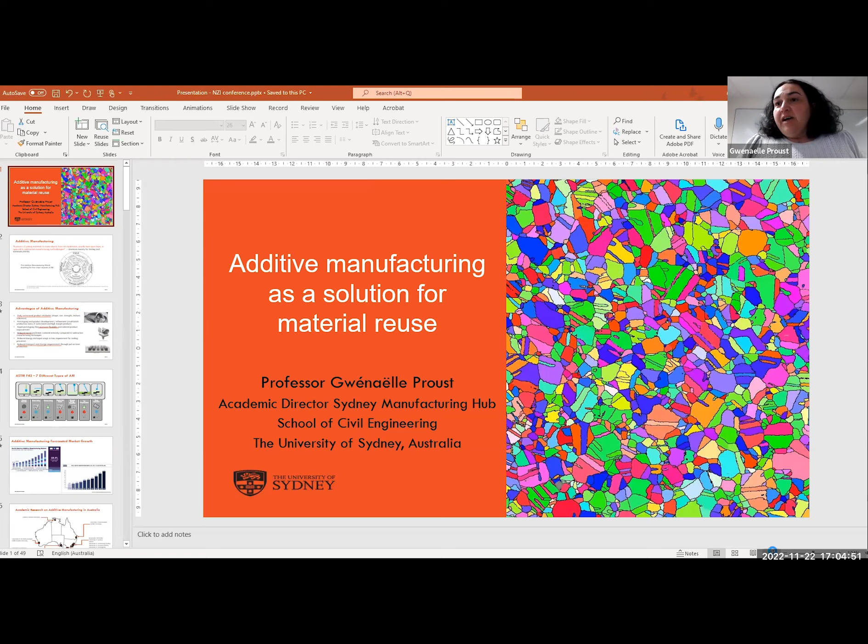Thanks, Anna. So I'm going to share my screen, and I also have to say that my final exam is taking place from now till 6:30, so I'm basically on call. If my mobile rings, I'm going to have to take the call - that means there's a problem with my final exam, so please apologize if I have to leave. Hopefully enough people are reviewing the exam that there should be no issue. You should see my presentation now - do you see the normal mode or the presenter mode?

Thank you, everybody. I'm going to talk about additive manufacturing as a solution for material reuse. Before that, I'm going to talk about what additive manufacturing is. I took the definition from ASTM, the American Society for Testing and Materials, which defines additive manufacturing as a process of joining materials to make objects from 3D model data, usually layer upon layer, as opposed to a subtractive manufacturing methodology, which is what has been done in the past.

This encompasses a lot of things in additive manufacturing. I've also added here the additive manufacturing wheel that shows the different things that need to be considered when people want to do additive manufacturing. There's the method or technology that needs to be used, the material that you want to use, what your final application is, and what type of input you're going to need to provide.

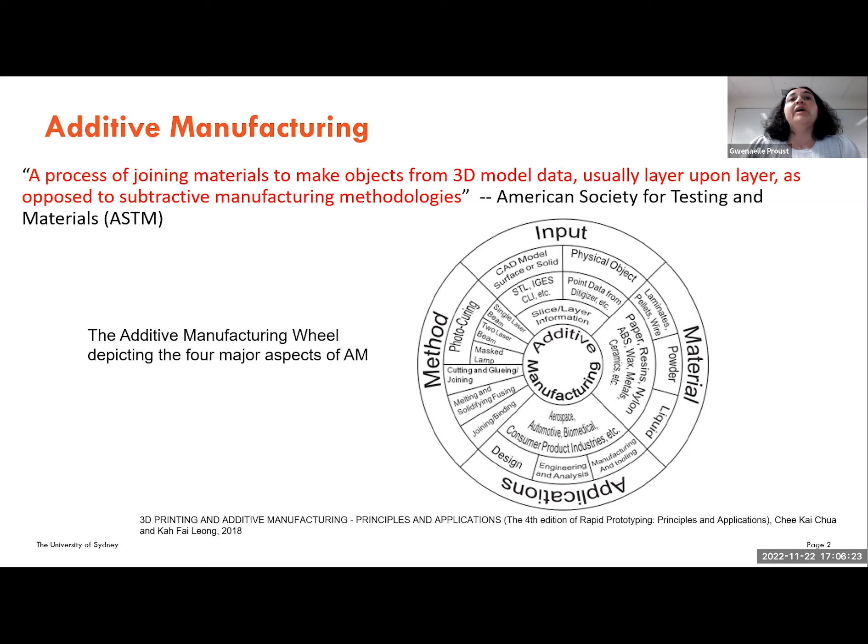So it's not like in additive manufacturing there is one machine that's going to fit all purposes. There are different technologies, as I'm going to explain, and there's a lot of consideration that needs to be taken into account while people are trying to find the proper additive manufacturing technology for their applications.

So what are the advantages of additive manufacturing? You can truly customize product attributes. You could make a single component and the investment would be the same as if you made 100 components - you don't need to make a mold. You can change the shape just by changing your 3D model.

There is no limited number of components that you need to make to have a return on your investment, because changing the shape, you will not need to change anything on the machine. It's a fast way to do prototyping and product development and refinement, small batch production.

You can customize a lot of things. During the process, you can change your mind. You can have the design engineer coming with new requirements, and you can remake it. That does increase the flexibility and help you tailor product improvement for the applications.

It's also a process that reduces waste during manufacturing, because you are not doing a subtractive technique, so you don't waste material by machining it and removing it from a block. Here, you're technically using only the material you need to make a component.

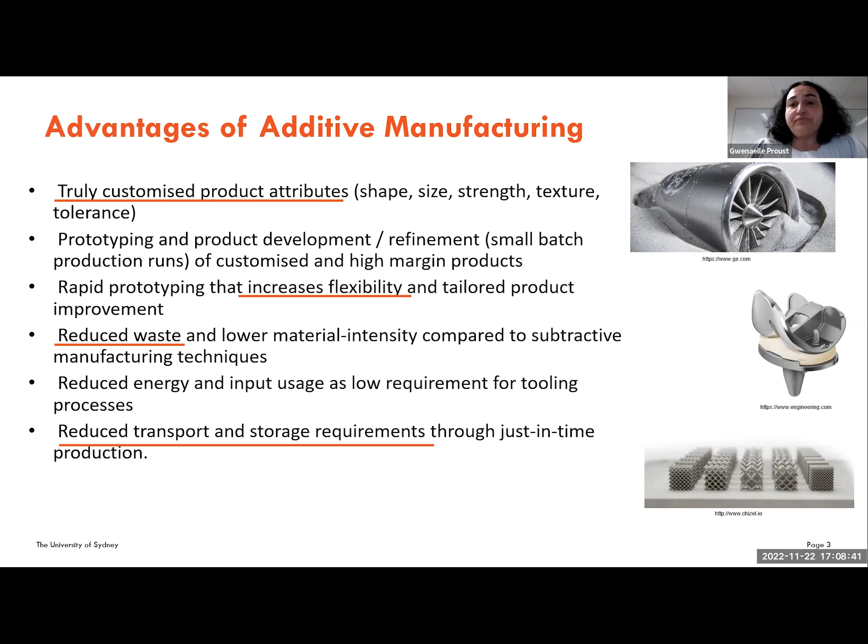So if we talk about additive manufacturing, I already mentioned there are different technologies that exist. According to, once again, the American standards, they have categorized 7 different technologies for additive manufacturing.

The one that people are most familiar with is material extrusion, which is usually the one that everybody has seen. Some people even have that at home, where you have a polymer filament that you're going to melt, and then you deposit the melted material layer by layer and create a new 3-dimensional object.

There are different techniques that exist now in material extrusion. You can even do metal material using this technology. You can even do ceramic using paste printing. So that's a large category - one category of additive manufacturing, but behind that, you have different technologies that exist to produce different types of material.

Then you have binder jetting and material jetting that are similar, where you have powder material that is going to be encapsulated in some binding material. In binder jetting, you build your part inside a resin, for example, while in material jetting, you only deposit the material that you need. But the principle is the same - you're going to have to cure this material and form the part.

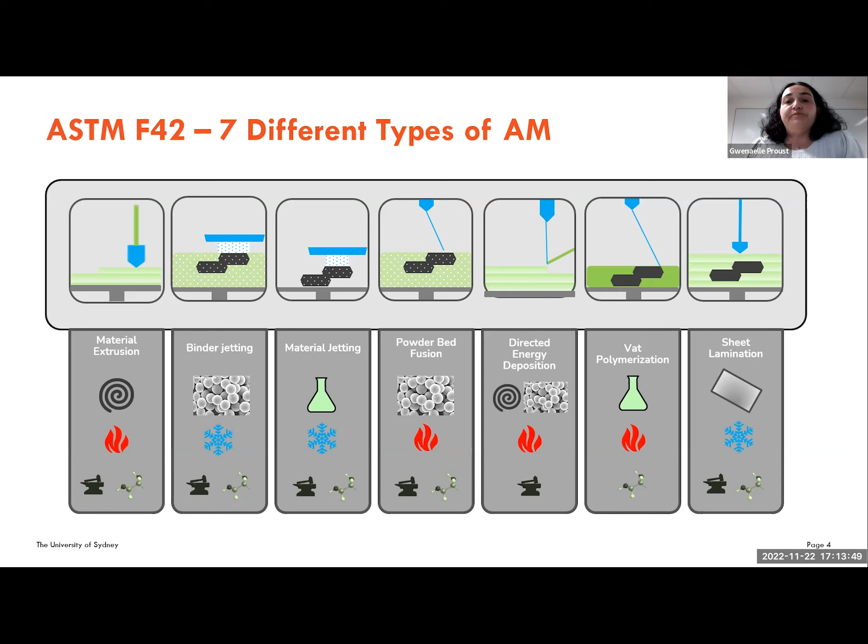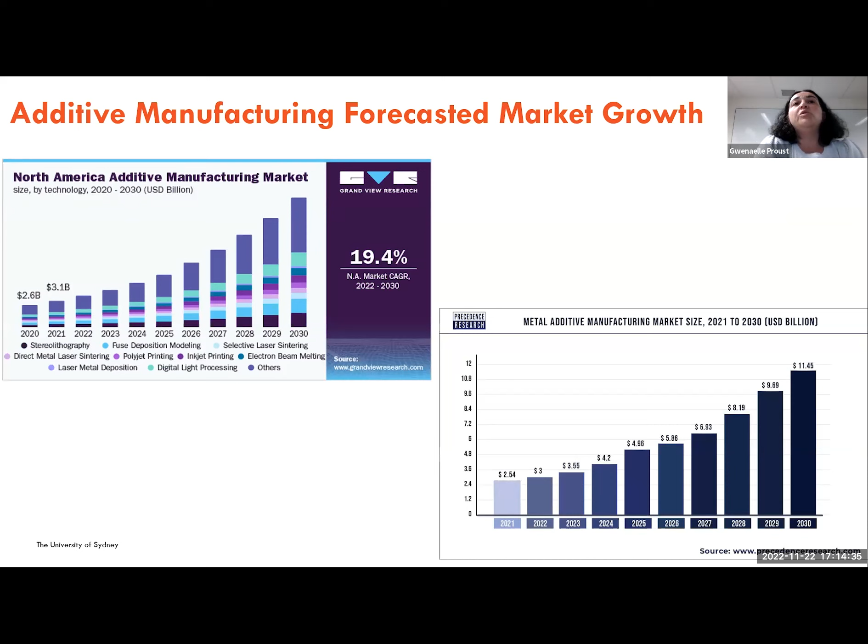Now, if we look at the forecast market for additive manufacturing, here are the numbers for the US. On the left, the first graph shows the predicted use of additive manufacturing according to the different technologies that exist, and you can see the prediction shows there's going to be growth. This encompasses all metal, ceramics, polymer, and composite material. On the right, this graph is only limiting itself to additive manufacturing for metals, and you see that metal is also going to grow, but that's why the numbers don't match between the two graphs—one is metal, the other is all materials combined.

Now, if we look at Australia, what's happening? Additive manufacturing is a hot subject at the moment. Here it's just a map that shows you that different universities and labs around Australia have invested in capabilities to look at additive manufacturing. There are different types of technology all around those places—a lot of powder bed technique, but also some more exotic things that exist at one university and another at another university.

That being said, for people from other universities, it might be time to have a national talk to see how we can advance additive manufacturing in Australia by combining our efforts together, and try not to compete with the same technology, but see what we can do to help each other and stay on top of what's happening, because additive manufacturing technology is evolving really fast. Keeping track of what's happening is going to require a lot of investment in the future, and I think we need to talk about how to combine our money and knowledge and expertise to keep on top of things. But that's a discussion for another time.

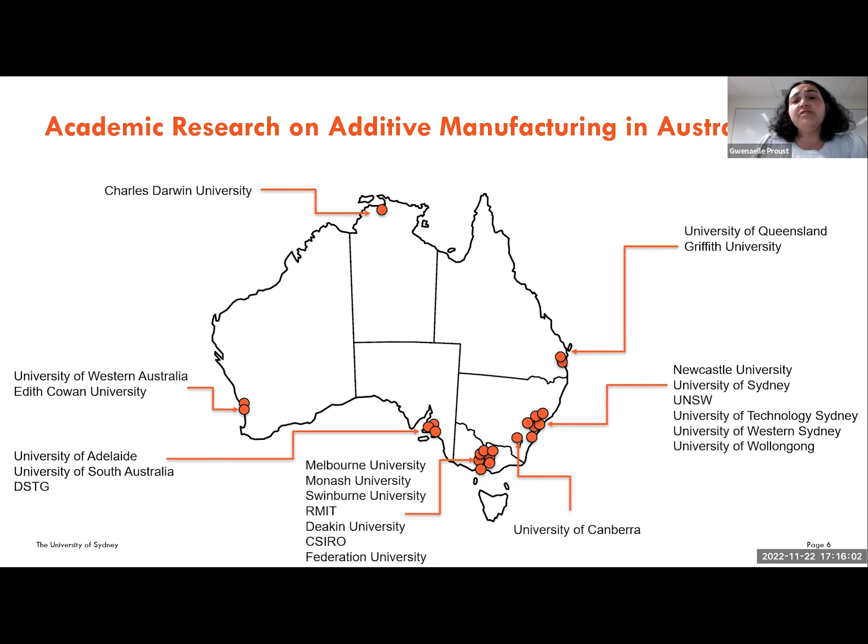Now we're talking about circular manufacturing economy. If we look at the traditional way manufacturing was done, we were talking about a linear economy where there was raw material, production, use, and then a lot of waste. That's not to say they were non-recyclable—for some of those, I think they were just not recycled. I think there has been a reuse economy put in place in the past already, where some recycling has been happening to add to production, but this was still not a circular economy.

If we look at what some governments, and I know in Europe, they've put this objective to have a real circular economy for manufacturing, where production, use, and recycling are all together and raw material is added as needed, but there is no more waste. So are we going to be able to reach that? And how can we do it? And how is additive manufacturing going to help us?

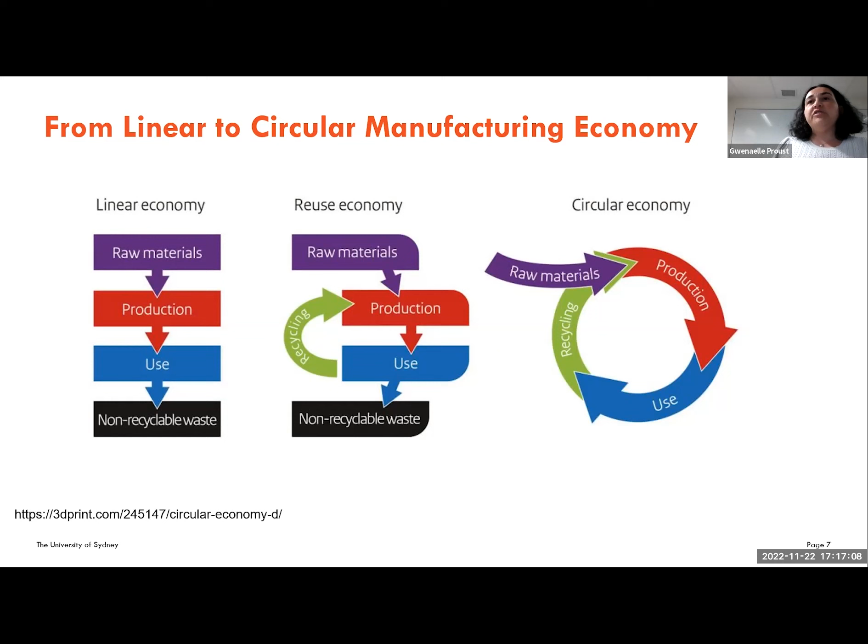I just want to show you some examples of what is already done in additive manufacturing in the circular economy concept. So these are some products. The first one on the left—if people look at the Olympics in 2021 in Tokyo, if you notice where the people were standing on the podium, these were actually 3D printed podiums, made from upcycled pellets. I think they produced about 21 of those podiums, all made from recycled pellets. There are a lot of companies—I just show one example here—that make glasses frames using recycled plastic, and they are making those frames using 3D printing technology.

This is about polymer. Can we do something with other materials? There is research being done at the moment, not yet on the market, to see if we can produce powder for additive manufacturing by recycling chips from machining. All the waste produced during machining - can we make something useful out of that? For the moment it was all scrap material with nothing to be done with it, and people are looking to make something useful out of it, such as powder. There are different projects going on in that area.

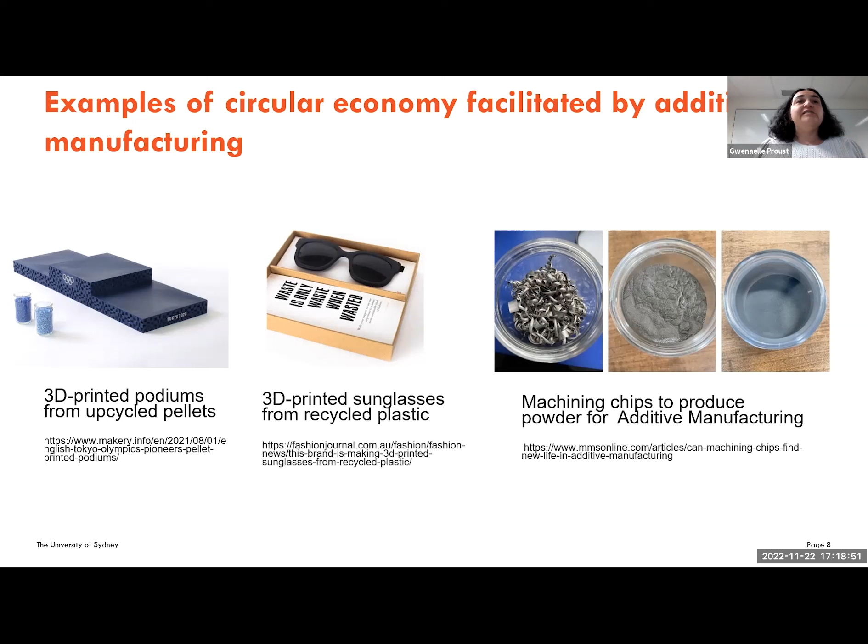What I'm going to present now is research that my group is doing at the University of Sydney on some specific projects. The first one is a collaborative work with Sandra Löschke, an associate professor in the School of Architecture at the University of Sydney. We also work with some people from the School of Chemical and Biomolecular Engineering at Sydney. John Mai, Jordan Gerdis, Yirong Wang and Todd Zhu were some students who have worked on this project, and a few more have started to work on it.

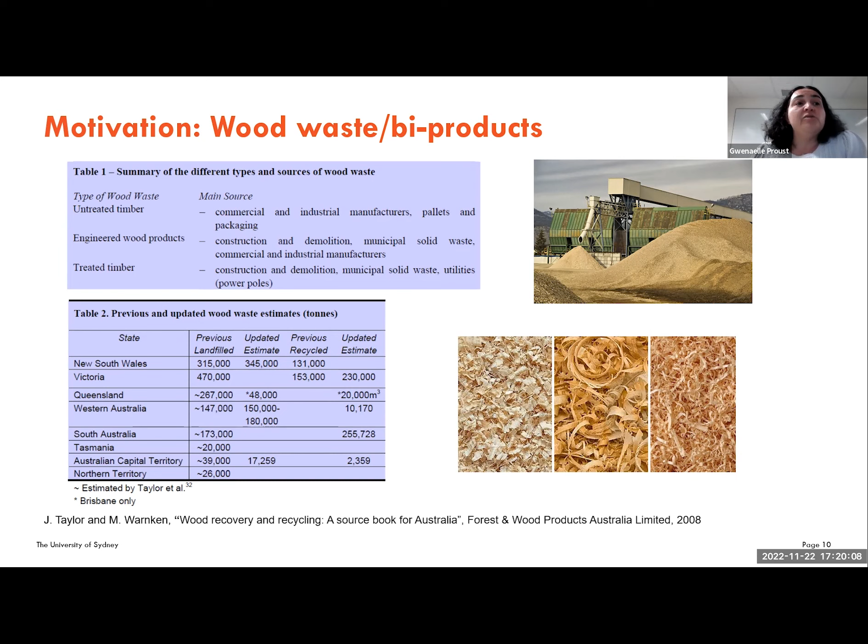What we want to do is upcycle forestry byproduct - can we do something useful with this product? So what is the motivation behind that project? There is a lot of waste in the wood industry coming from timber mills, or going to landfill from engineering products, solid waste, municipal solid waste, or even furniture waste. Is there something to be done with that? Can we reuse that material?

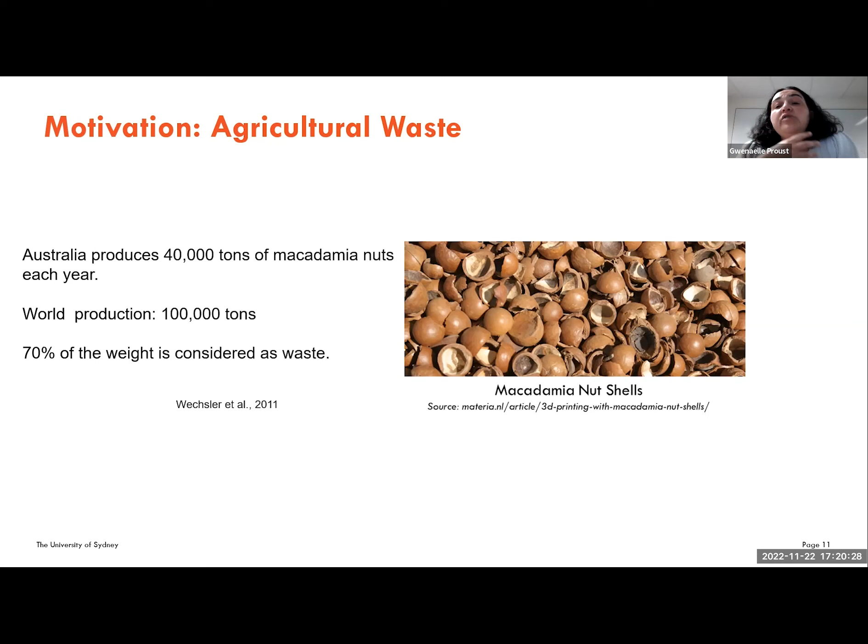There is also some agricultural waste. For example, macadamia nuts are produced in Australia - 40,000 tons each year - and 70% of the weight is considered waste because this is the shell that nobody eats. So what can we do with this waste material?

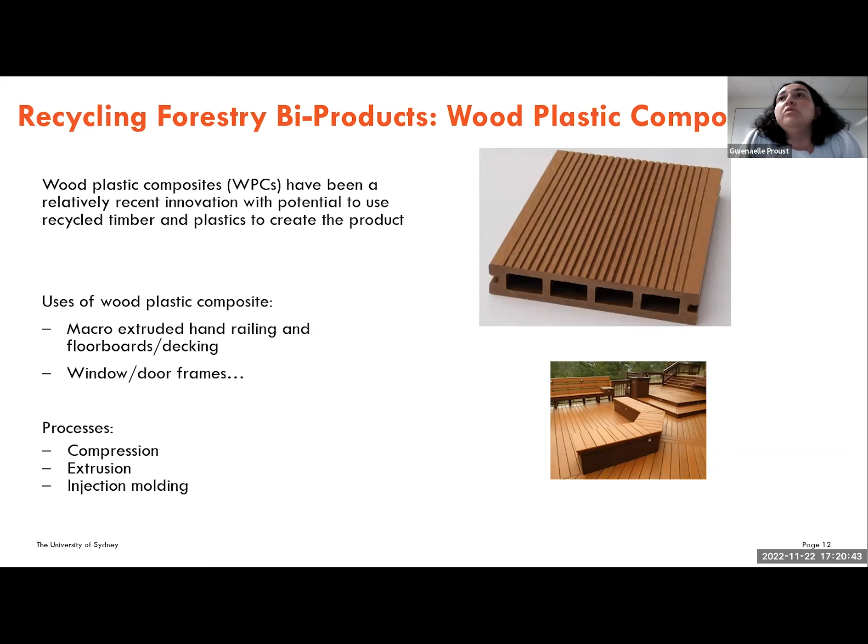Wood plastic composite is not necessarily a new concept, it's been around for some years now, and there is technology that has been used, such as compression, extrusion, injection molding, to produce those materials. We want to see if we want to make something more complex in shape, can we use additive manufacturing as a technique to produce those components.

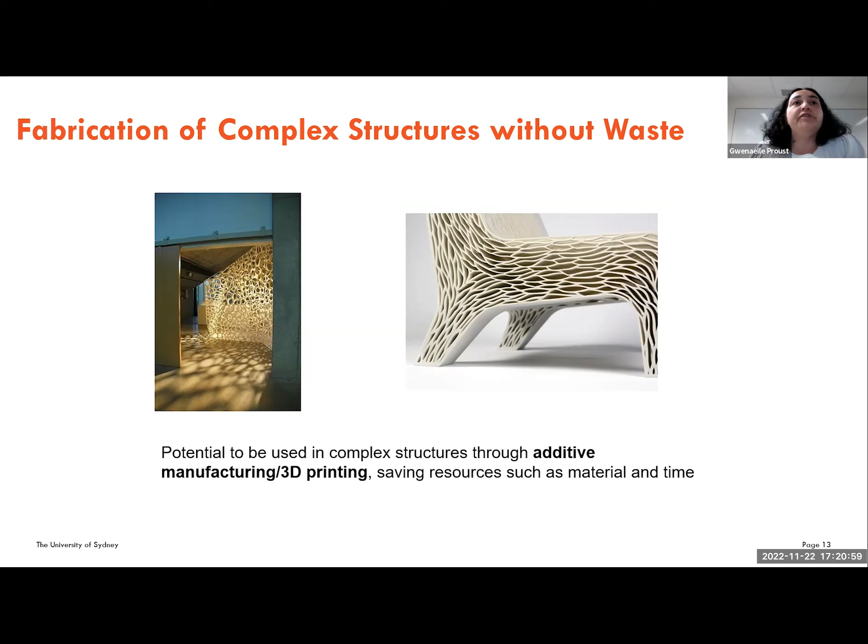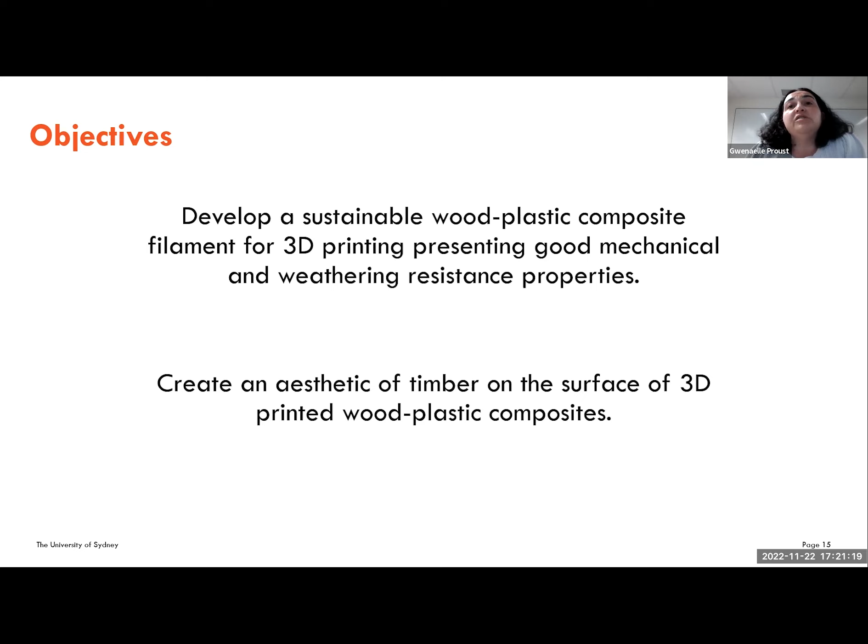For this project, we use one type of technology, which is fused filament fabrication technology. The two main objectives of this project were, first, to develop a wood plastic composite filament using material waste, and also to create an aesthetic of timber, because we want the thing to be aesthetically pleasing as well.

First we looked at developing the materials, so we looked at different sources of waste - some hardwoods from Australia, red gum, gray box, and also macadamia nutshell. Although in this presentation, I'm only presenting results on the red gum and the gray box.

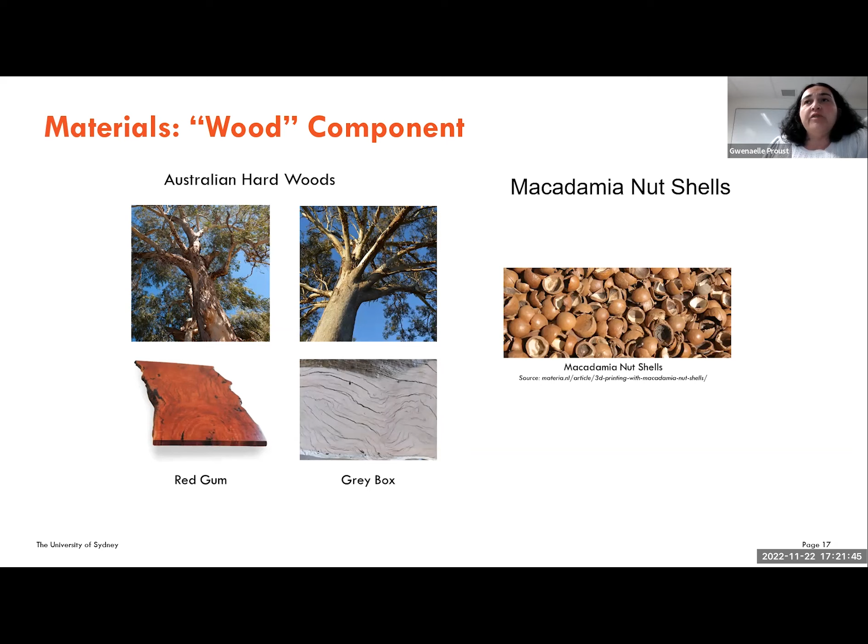Our material of choice at this moment has been ABS, because this is the most common polymer used in FFF, and this material can be recycled - that's the idea behind this choice. We have looked at other polymers as well, polycarbonate, PET, but I'm going to focus on ABS.

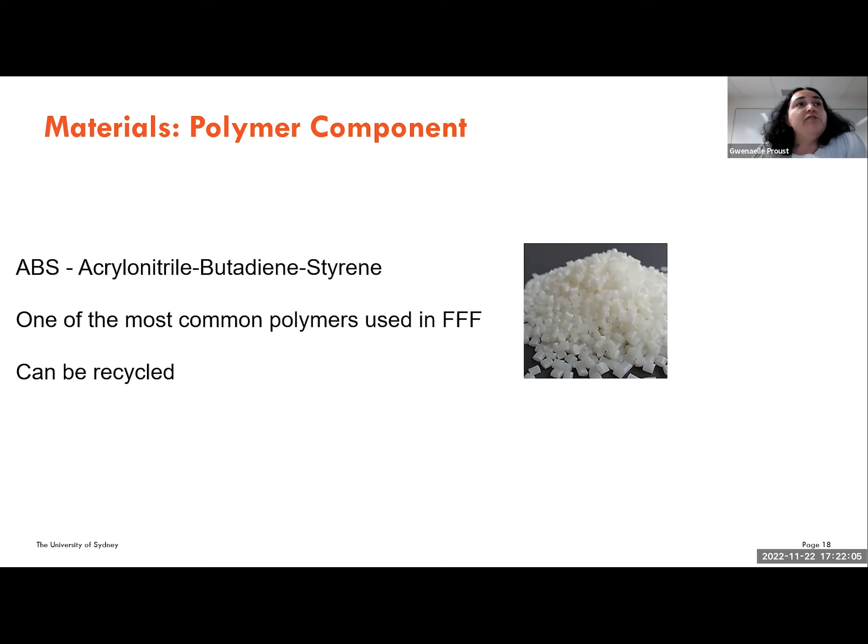Because wood and plastic actually don't like each other, we had to add some binding agent. Here we look at two different types of binding agents, maleic anhydride and lignin. Lignin is also a byproduct from the pulp or paper industry, and can be extracted and coming from waste as well. Although in this presentation, I'm going to only show data from our maleic anhydride binding agent.

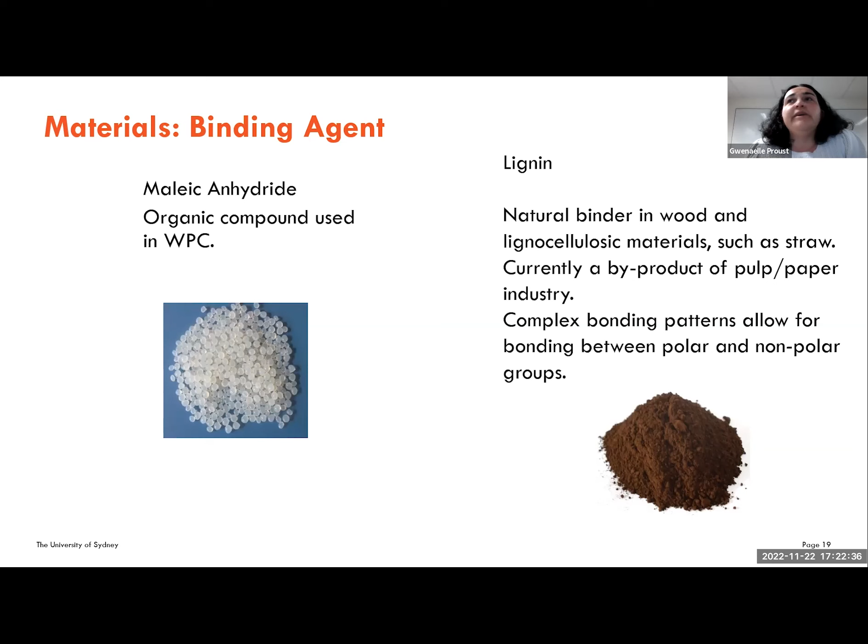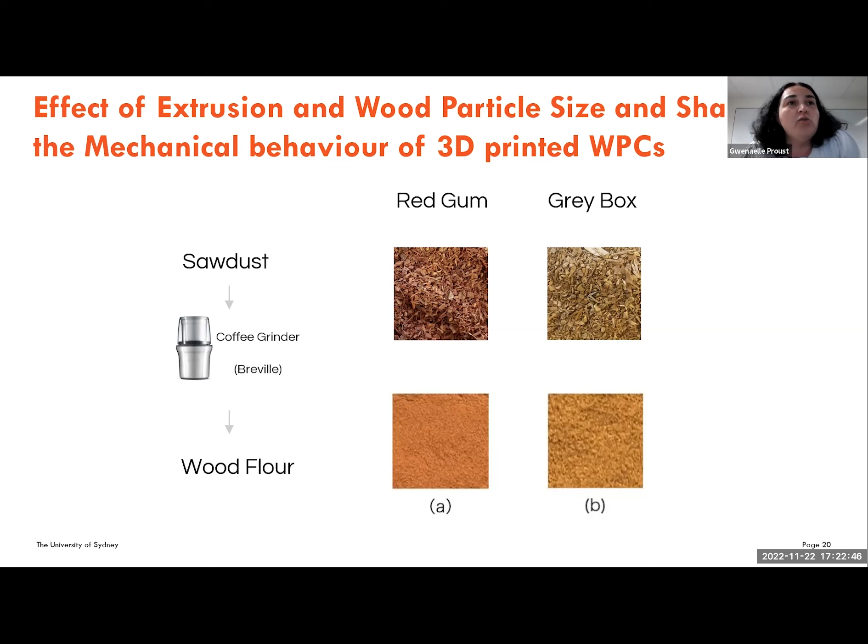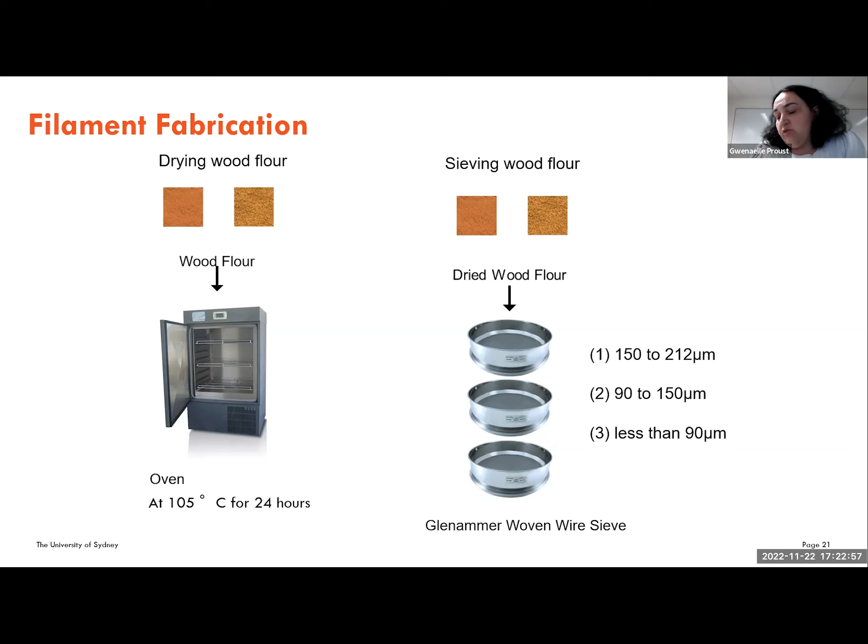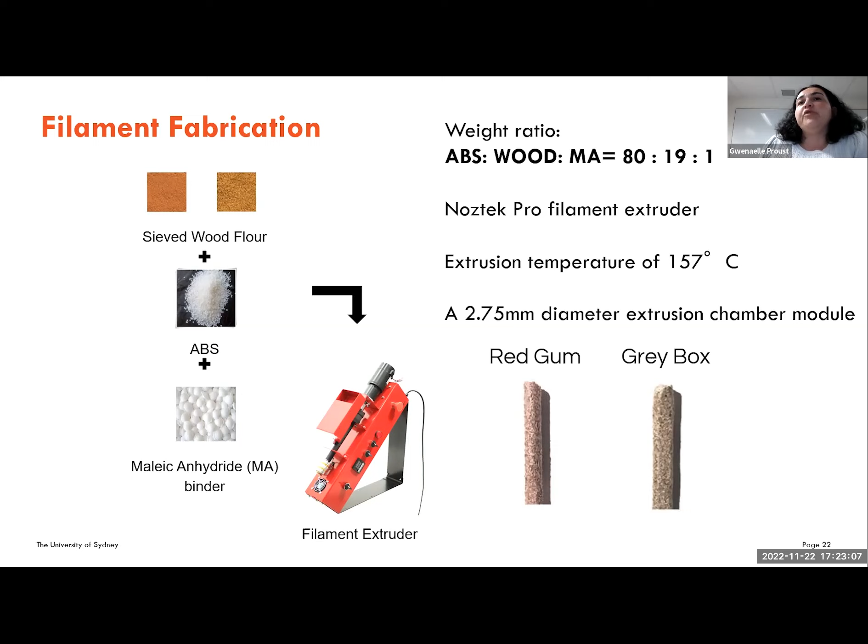We started by producing our wood flour using wood chips of red gum and Grey Box, in a low-cost lab where we had a coffee grinder to make our powder, but that works. Then we dry our flour, sieve it to look at the effect of particle size, and then added ABS and maleic anhydride. We put that on a filament extruder and produced some filament from the red gum and Grey Box. Then using this filament, we used a 3D printer to produce specimens for mechanical testing.

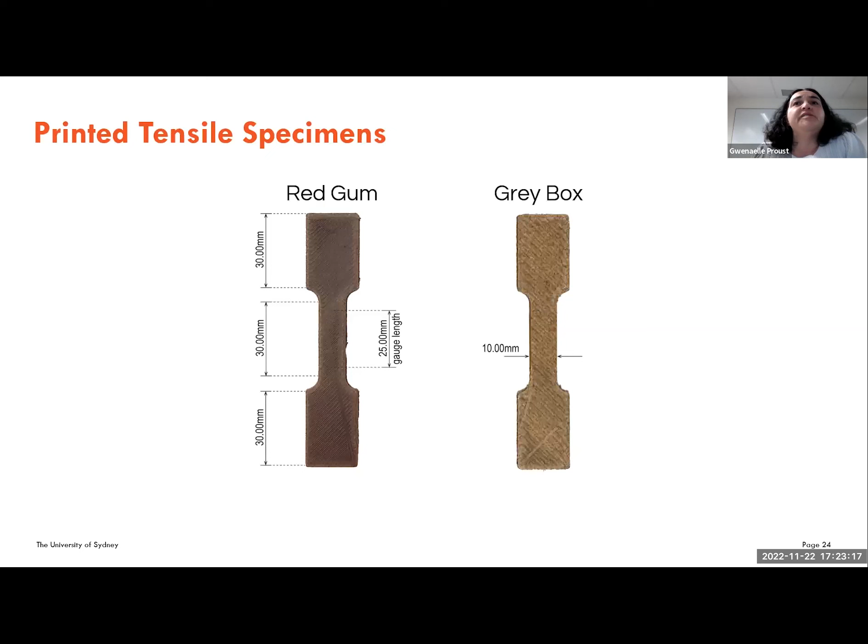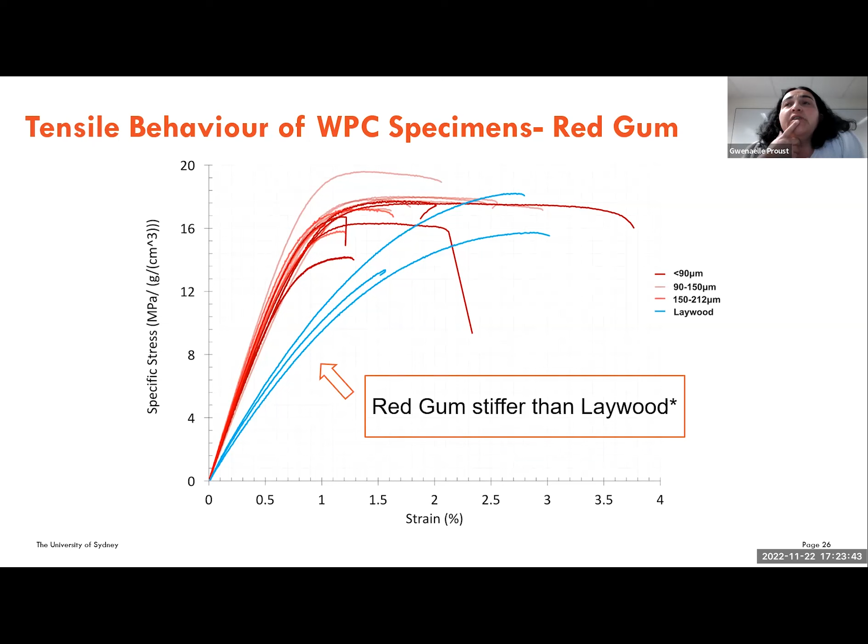These are all the specimens that a specific group has produced, and we've tested that. We compared the data with Laywood, which is a commercially available filament. What we saw is that in terms of strength, we were matching what was available commercially. The advantage is that our material was stiffer than what is available commercially. Same thing when using the Grey Box - it's not as strong, but still stiffer than the Laywood.

In terms of stress, we saw that there is an effect of particle size, especially for the Grey Box. For the red gum, it was less obvious.

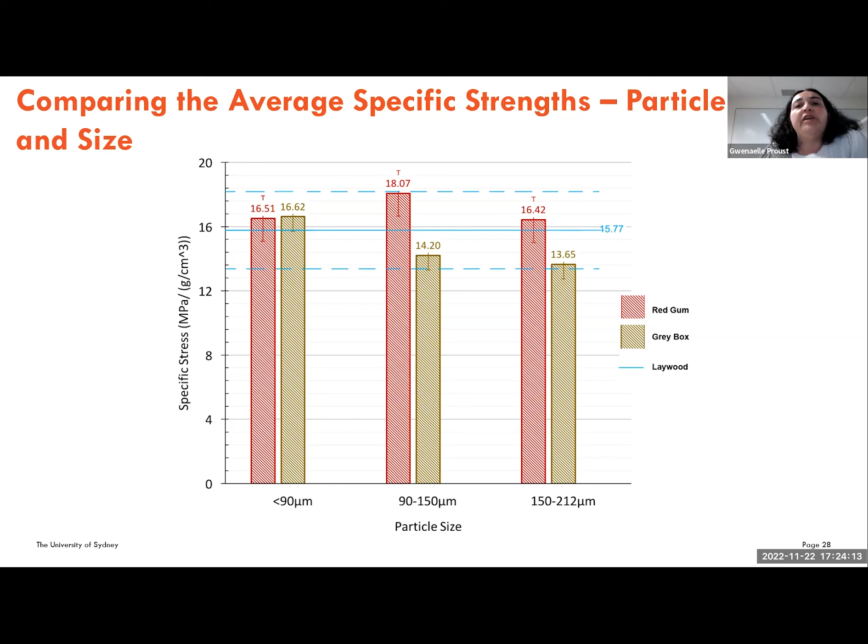We see that we were matching or surpassing the properties from the Laywood, especially for the red gum material. So that's why in the future we are going to be concentrating on the red gum.

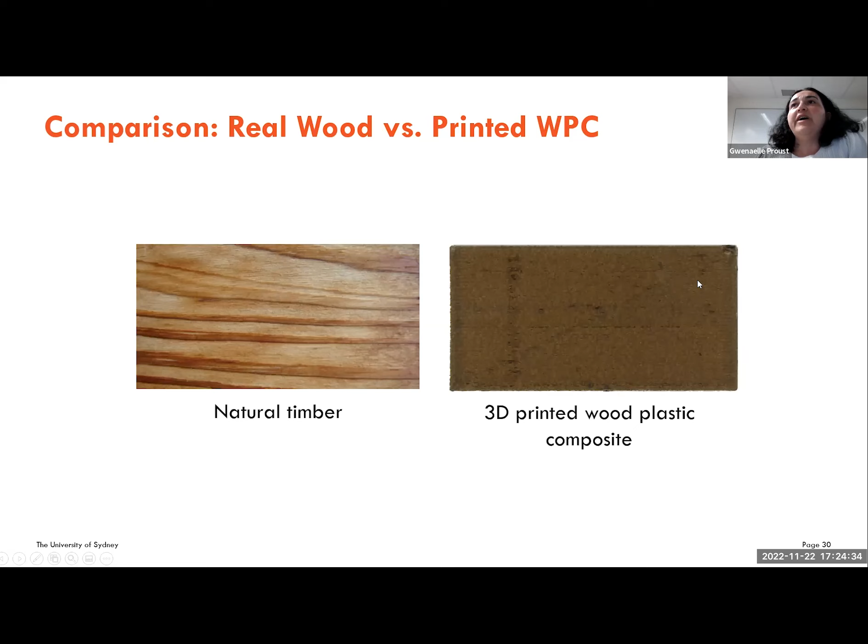Now if I look at the aesthetic when I print wood plastic composite, that's what it looks like on the right. What timber looks like is on the left. You would agree that what's on the left is more aesthetically pleasing than what's on the right. So now we want to see, can we produce something that looks like that?

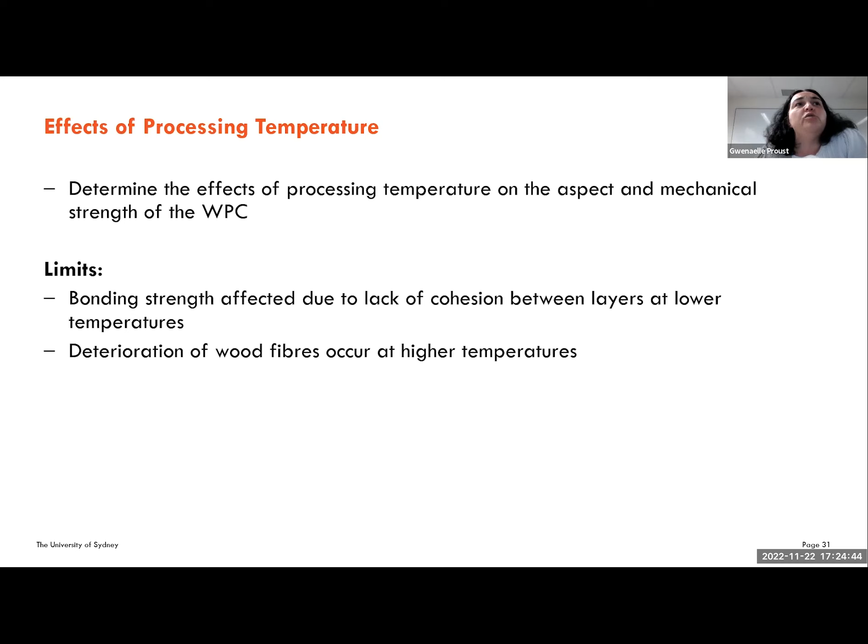So what we did is that while we were testing the effect of processing temperature on the mechanical properties of wood, we noticed that there is also a change of color of what we printed. And this is what was used as a strategy to reproduce the grain structure of the wood by changing the temperature.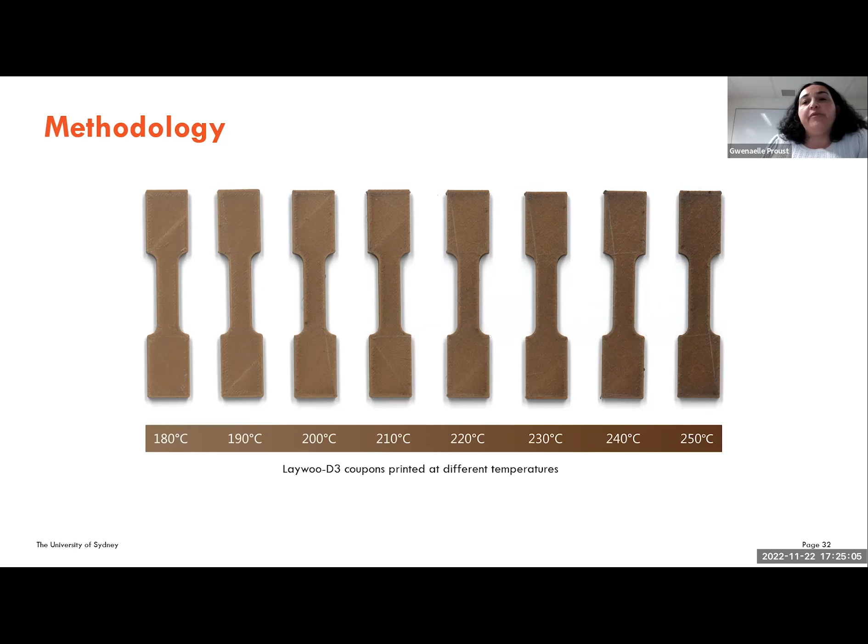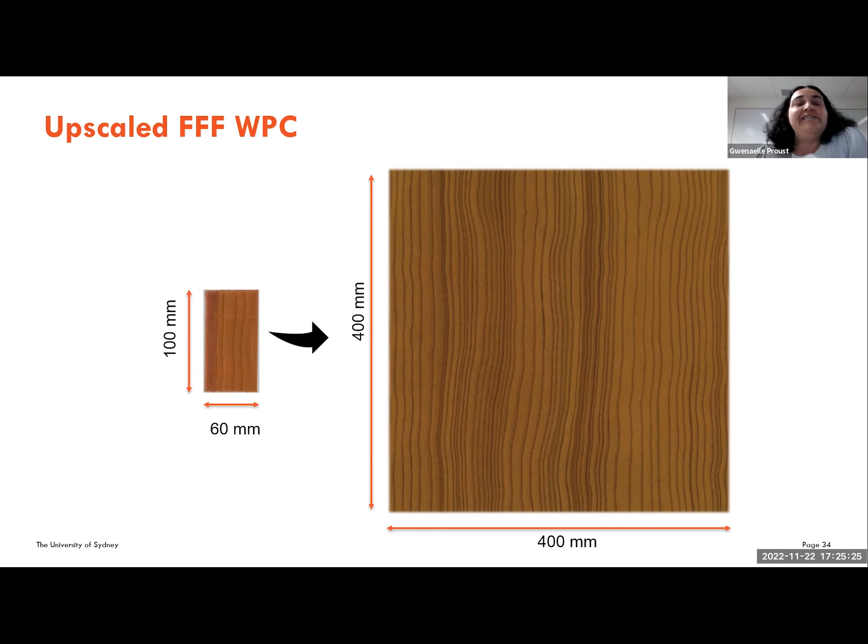Then we went to create also bigger panels with 3D dimensions, like more, thicker than the previous one, and also changing the surface and still have a wood idea, which I think was also a success.

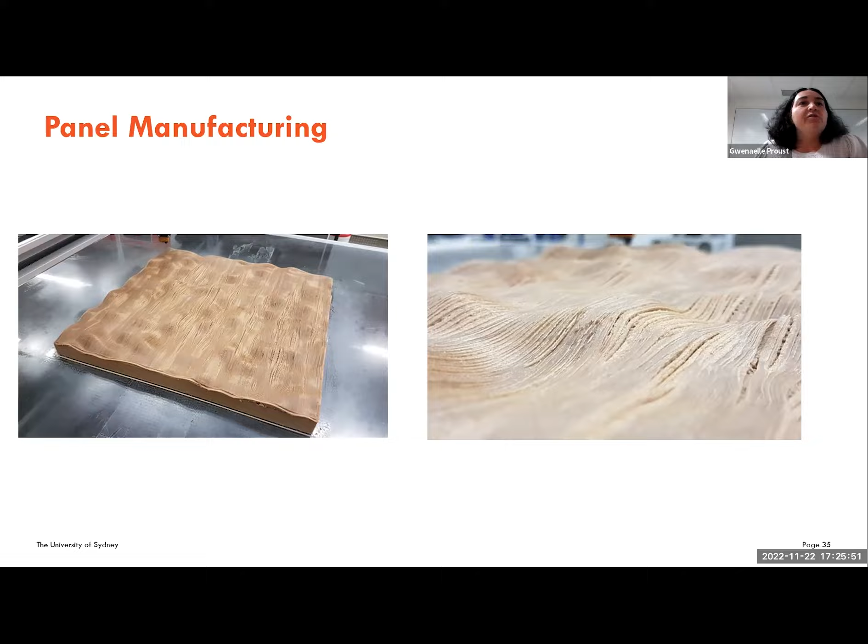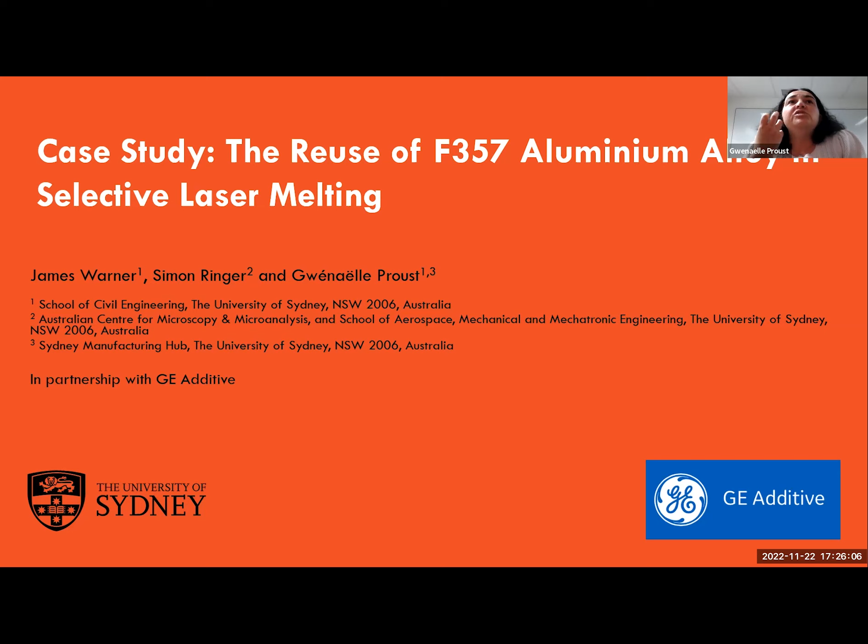I'm running out of time, so I'm going to talk fast about this second study, another thing we're looking at here with my collaborator Simon Ringer and my PhD student James Warner, where we want to look at strategies to reuse the powder in selective laser melting.

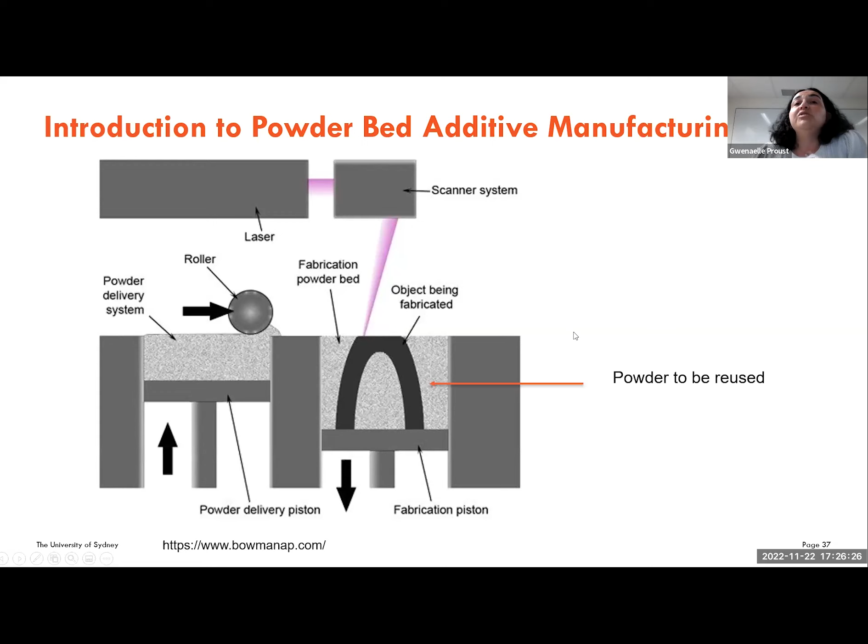So what do we mean by that? When you do powder bed additive manufacturing, this is the component that you're printing. All that is powder that is being used but not melted. But we don't want to put that in the trash, we need to reuse it. So what we want to do is find the best strategy where we can put a system in place to first save energy, because remaking powder costs a lot of energy, costs a lot of money as well.

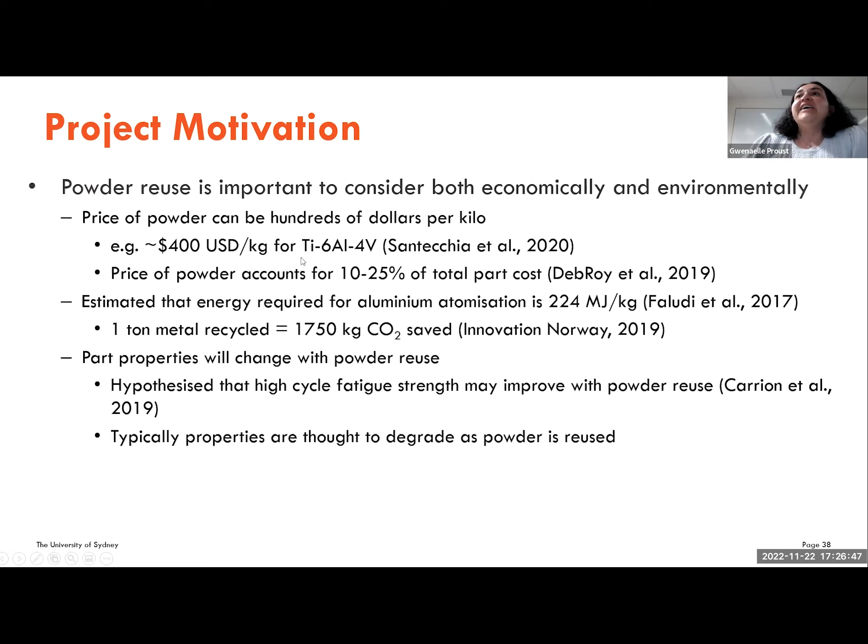And you wanted to know, Anna, the price of a kilo of titanium. Here it is. We want to see how we can create a good strategy for reuse.

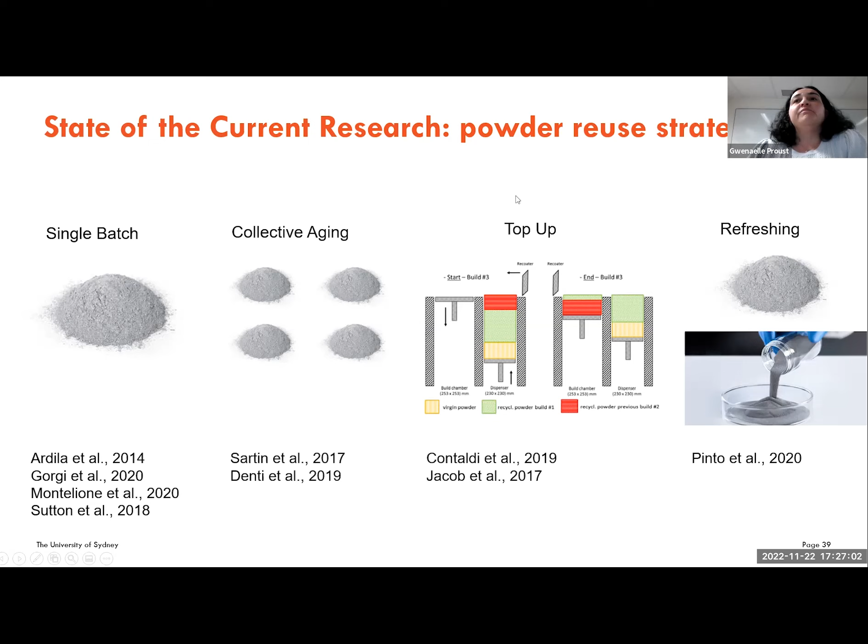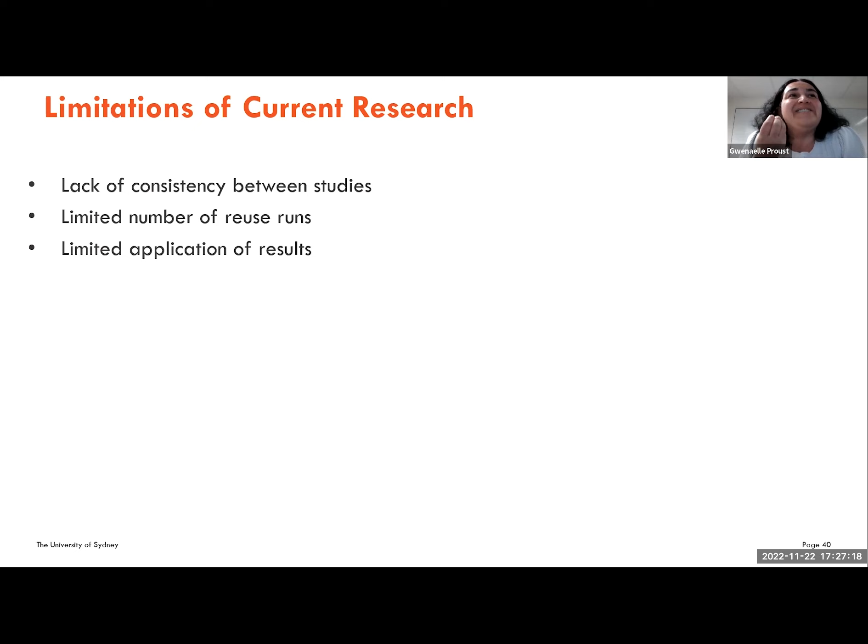In the literature, we see that different strategies have been explored, and I'm not going to go into detail, but the problem is there is no consistency between the studies. They have been done with a limited number of reuses, and usually the powder properties are not investigated. So the application of those results is limited. So the study we want to put in place is to develop a powder reuse strategy that can be widely used and replicated in industry, and to observe the property changes in parts manufactured with reuse of powders.

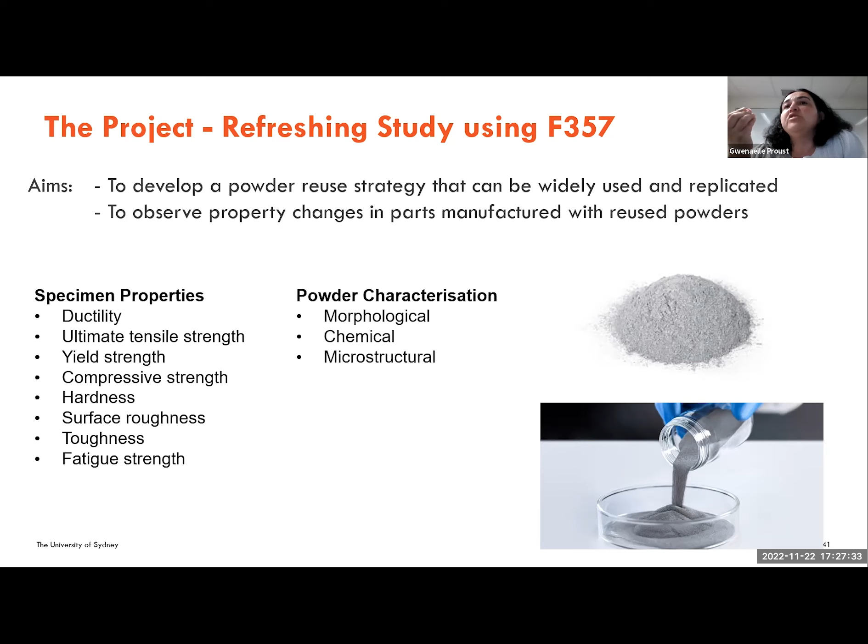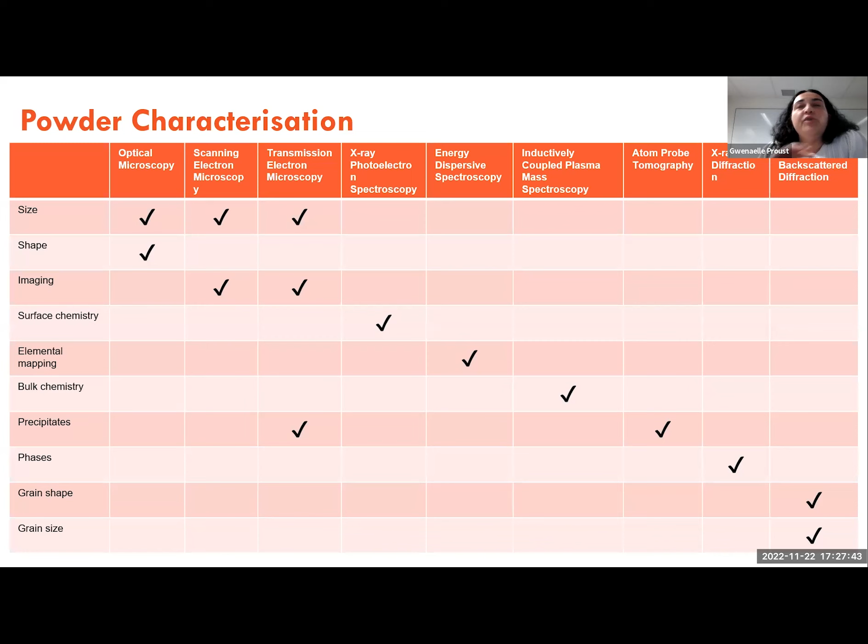And these are the strategies we're going to do: we're going to compare different strategies. I'm going to pass that. We're going to look at the powder during the different processes, characterize mechanical properties and microstructures, and expected outcomes have a consistent comparison so we can really establish a technique to best reuse powder.

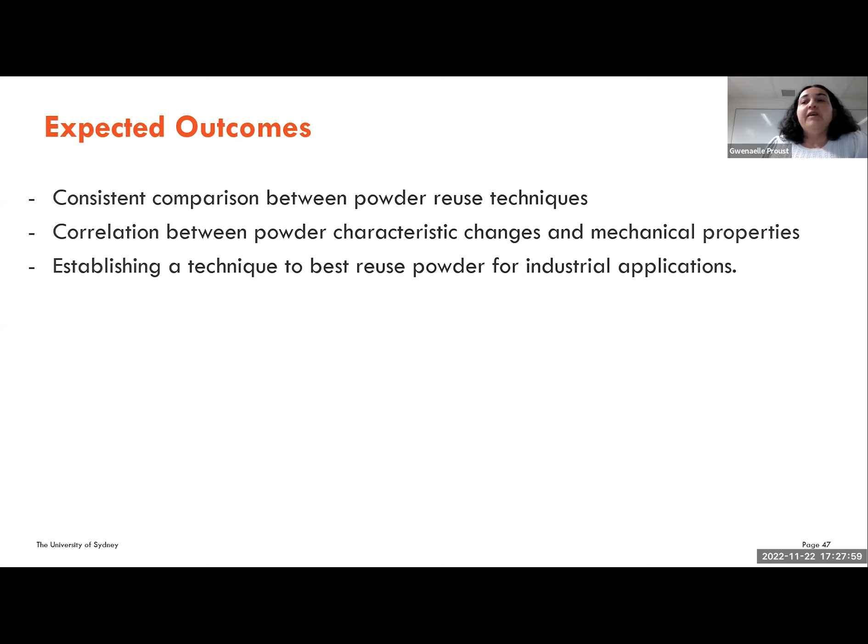So I'm going to conclude, and I'll be on time. Additive manufacturing, we see, offers possibility for reduction of waste, reusing waste, and therefore we're going to be a step closer to reaching this circular economy framework for manufacturing. But can this be done while saving energy and being environmentally friendly?

So what do I mean by that? If we want to make powder for powder bed manufacturing, making powder takes a lot of energy, takes a lot of time, takes a lot of money. How is a process to try to transform scrap into powder going to be economically advantageous? Also, if you look at the chips from machining, they're usually full of oil because that's what you do when you machine.

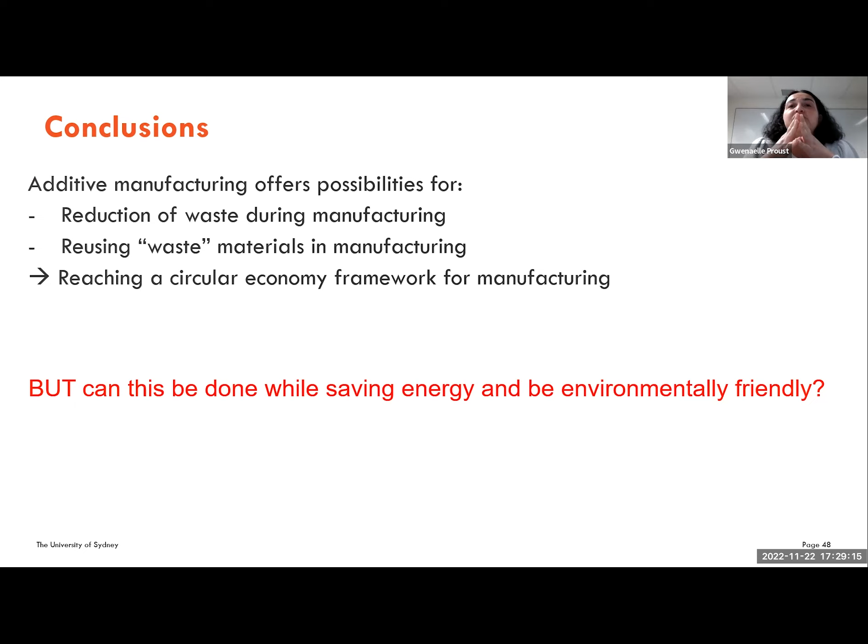So you need to clean them. What do you do with the cleaning process? How are you going to get rid of this water? So there is a bit of a thing that I'm not saying it's not possible, but I think there's a lot of things still to be done to make all this process energy economic and environmentally friendly.

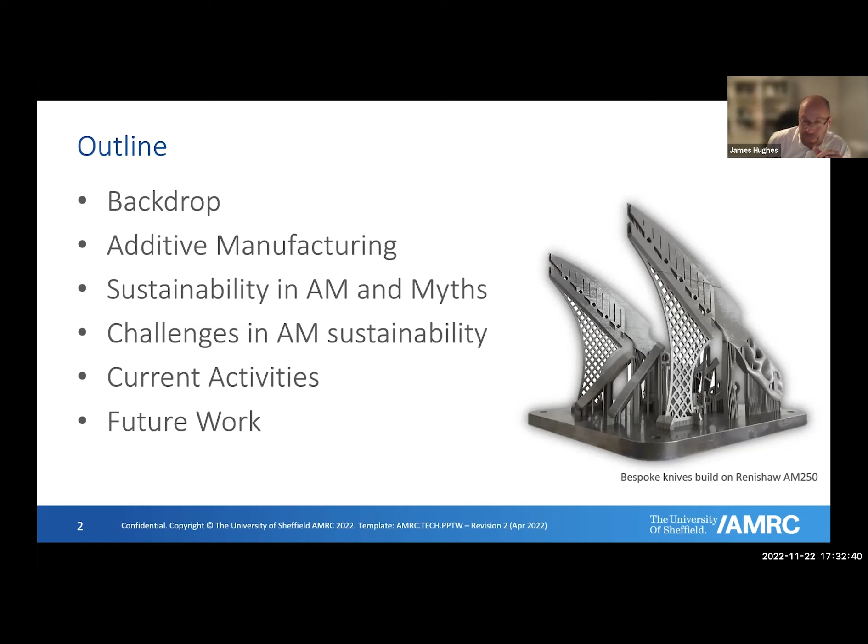Okay, so you might be wondering what the AMRC is. AMRC stands for the Advanced Manufacturing Research Centre. As Anna mentioned, we've been going for around 20 years now, helping industry with their research and development challenges. We're involved in anything advanced manufacturing, from machining technology through to composites, automation, Industry 4 digital technologies, and my own area, additive manufacturing. So we're very much about solving industry problems, not just academic research interests. We're very focused on the current challenges out there. We're currently about 600 staff, and we cover all these different disciplines.

We're also part of the UK's High Value Manufacturing Catapult network. That's a large network of research centres spread across the UK, similar in nature to the German Fraunhofer Institutes.

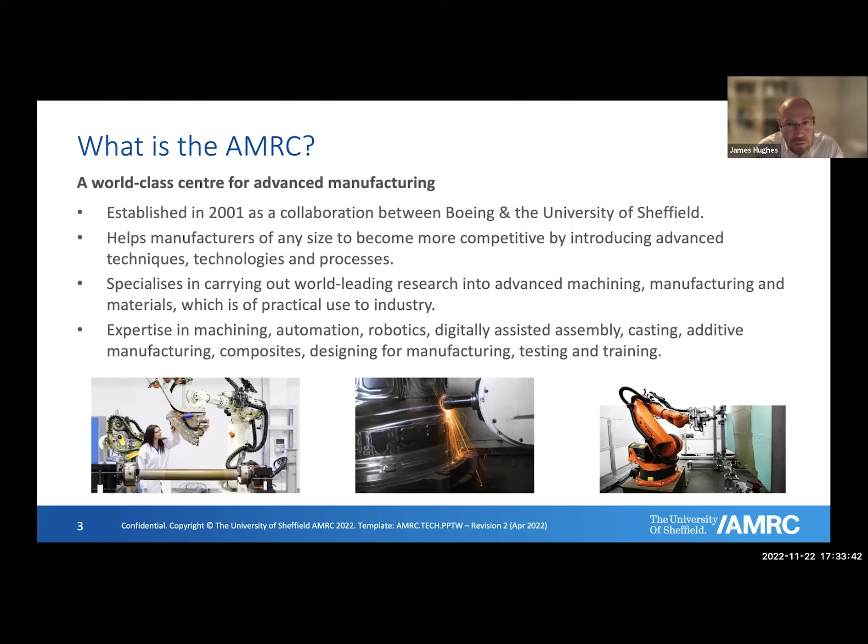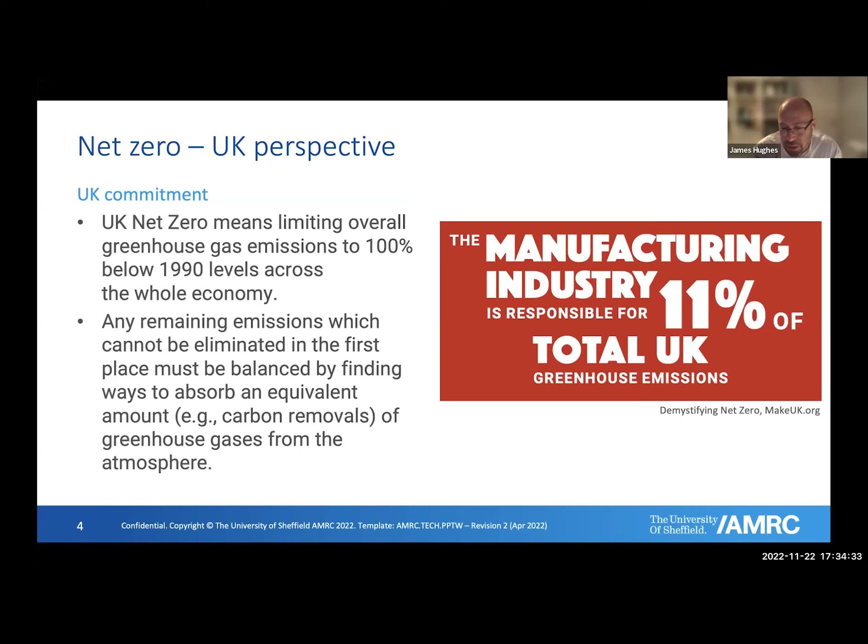So a bit of scene setting in terms of the background. The UK have set some fairly ambitious targets for net zero that they've actually written into law recently, dating back to, I think it was 2008 originally when they started coming into law. It's a commitment to reduce greenhouse gas emissions to 100% below 1990 levels across the whole economy. Purely from a manufacturing industry viewpoint, that's quite a difficult target to hit, because UK manufacturing accounts for approximately 11% of greenhouse emissions. So apart from eliminating greenhouse gases, if that can't be achieved, then there must be a way of absorbing the equivalent amount. And this is the targets that are being set for industry to meet.

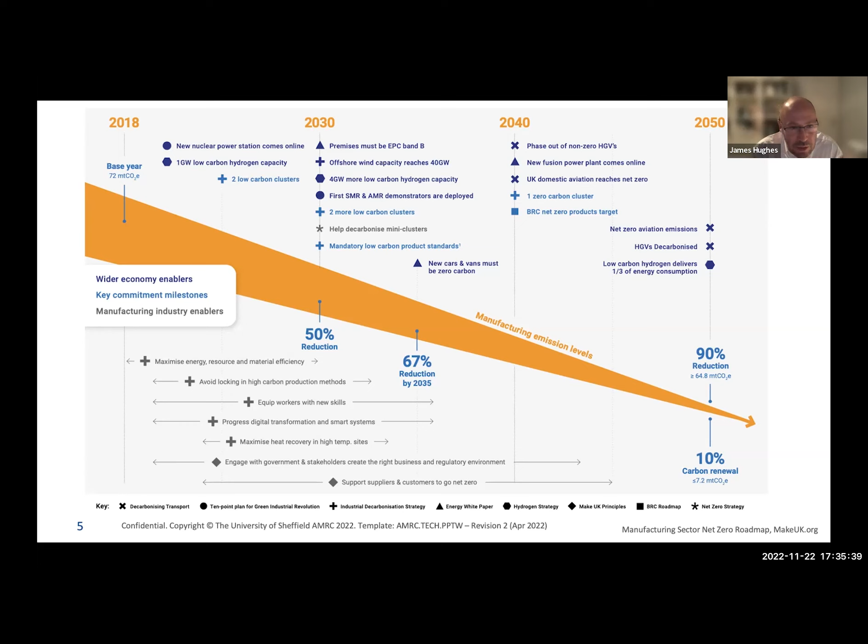A lot of industry are looking for technological solutions to help them achieve this target, and that's where we come in with some of our research.

If you break that down, there's basically three scopes relevant to the manufacturing industry. You've got scope 1 emissions - these are the ones companies can have direct control upon. This is directly generated emissions that the company can either reduce or eliminate entirely.

Scope 2 is harder - this comes from your energy mix, depending on your supplier. If there's a lot of renewables in your energy mix, then invariably your emissions are lower. If it's a lot of electricity generation via burning coal, then obviously they're going to be very high.

That's something harder to control, and it depends on your region in the world, to be honest. Then there's your scope 3 emissions, which is in your value chain, your supply chain - harder to control, and even harder to quantify in some ways. However, these are the critical bits in terms of making sure you can actually hit your target. It's very difficult to make sure you're not offshoring the problem to a different region of the world. So this is something to be aware of, and it comes into the conversation when we're talking about sustainability.

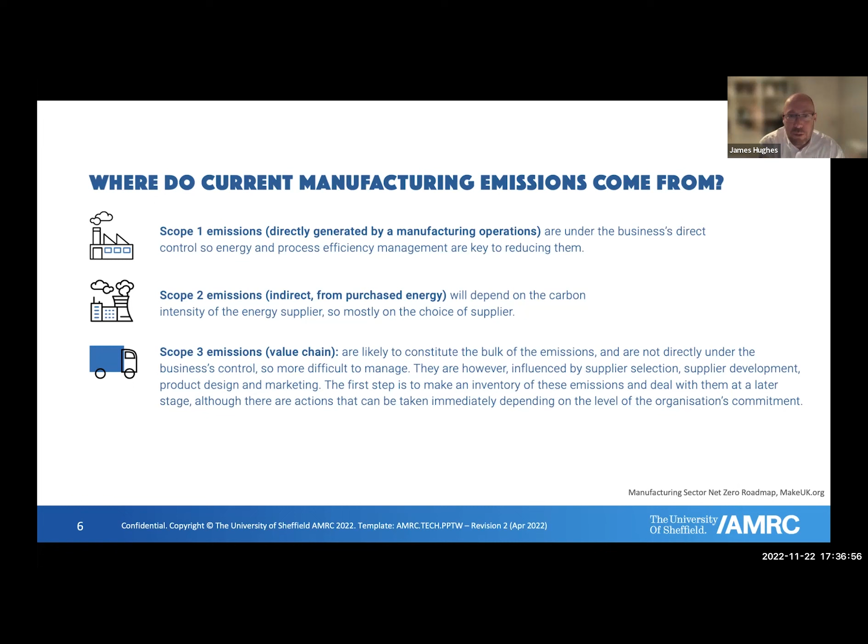Okay, so background to additive manufacturing. I'm not going to labour the point - I think you've already heard this, and it was very eloquently delivered. So again, it's adding material layer by layer to produce your component. 3D printing, additive manufacturing - interchangeable terms that are used regularly depending on your background and your preference.

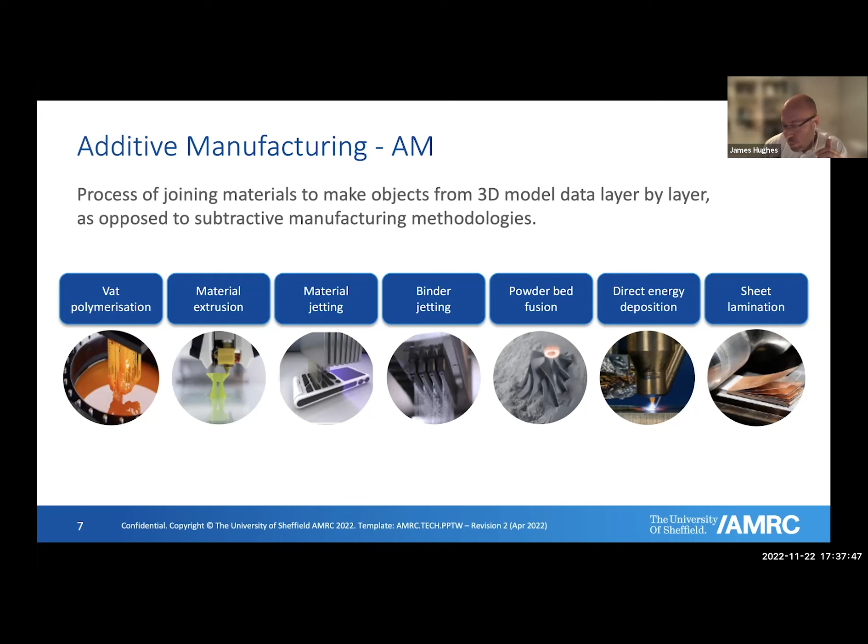As mentioned before, there are 7 main areas currently, however there are some new ones coming out, and I'm going to touch a little bit on additive friction stir deposition towards the end. So again, you put your CAD model in, you put your material in, you introduce some energy, and out pops your part at the end. Very simple, very straightforward, very low waste, theoretically.

And again, points are already being made very clearly - what are the advantages? You do have a lot of additional functionality you can put into your components, a lot of geometric complexity you can add. So lots of lattice structures, lots of generative design to get these very organic shapes that spread load whilst allowing lightweight and weight reduction.

You don't have to have large batch productions in terms of generation of tooling and then the creation of a minimum order quantity - you can go as low as you like. You've got a lot of flexibility, and this is where we see a lot of our industrial partners are particularly keen. You can really condense that development cycle down - if you want to create a new component, you can go from CAD to build very quickly, and if you want to iterate that design, you can do so very quickly. So a lot of flexibility in there, and that's one of the real key advantages.

You can also manufacture at the point of use, so your supply chain can be shrunk down. You're not having to transport parts from around the world. You do obviously have feedstock material you need to be aware of, but where you've got a method of production, that's where you can manufacture.

As mentioned, not so much on the specialized tooling and fixturing - obviously there are some requirements, but compared to traditional manufacturing, very little indeed. So reduced cost in that respect, and waste reduction, particularly with expensive materials. The figure of $400 per kilogram for titanium powder - that's very expensive material, you don't want to be wasting that or throwing it away if you have to. So a lot of potential there for recycling as well.

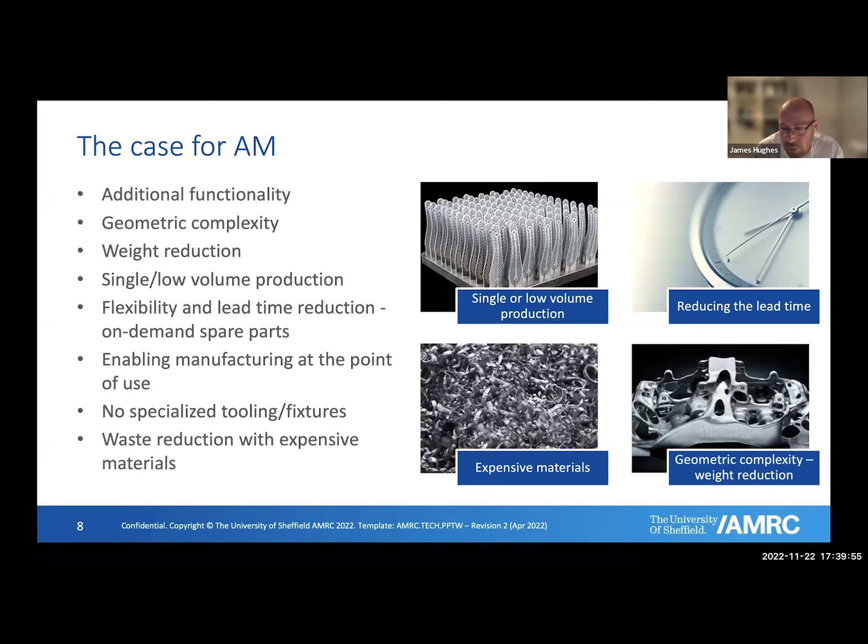In terms of the AM market, already touched upon, it's predicted to grow from 15 billion overall this year up to, I think it's, 85 billion in the next 10 years. So massive expansion, lots of opportunities, but it's not all roses, unfortunately.

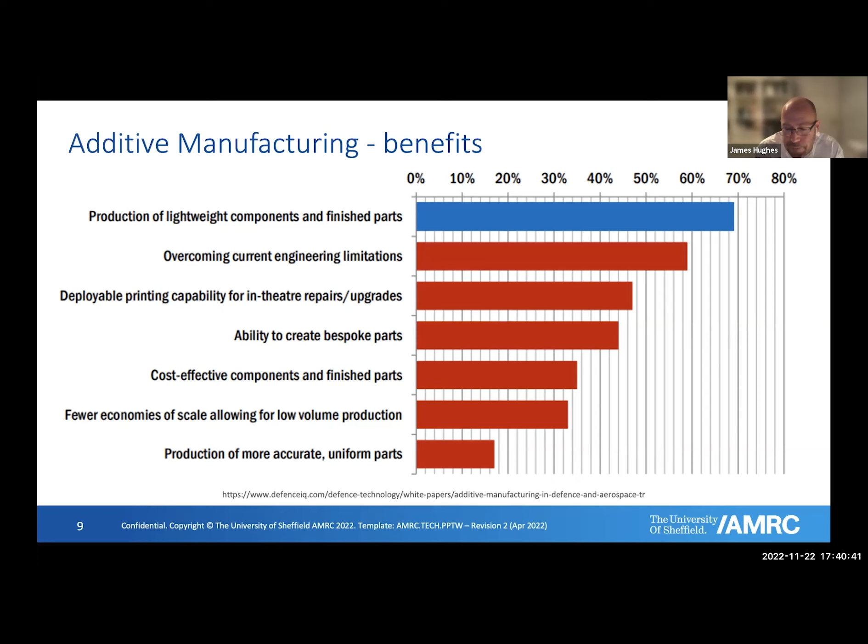Bit of a survey here from the aerospace and defense industry, one of the big uptakers of additive manufacturing at the moment. As you can see, where it really works is being able to lightweight parts, and this is where companies are really interested in terms of where they see the benefits for this. Any weight that can be saved on an aircraft is therefore worth its weight in gold, so to speak. You can have better performance, you can have increased range. So looking to take advantage of the fundamental advantages of additive manufacturing in terms of lightweighting is a key driver there, but there are other ones as well.